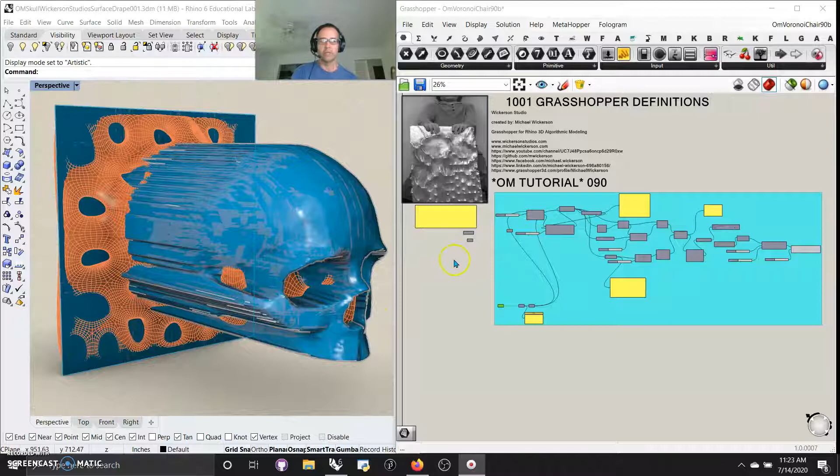This is one, but I did something with it that I think you'll find interesting. I don't know if I'll put the script online. I'll encourage you to go over the Voronoi chair example, but I've numbered it number 90. What I've done is found a way to bring out through a mesh a pretty simple form.

Let me swap this for a second. You can see a mesh here. If I put it to shaded, and then drape a surface over top - it's a pretty simple thing to do. Grab an object and drape a surface to it. Once you get that, whatever it is, a mesh or whatever you can pull offline, you can play with that a little bit as a surface. I think that's fairly interesting.

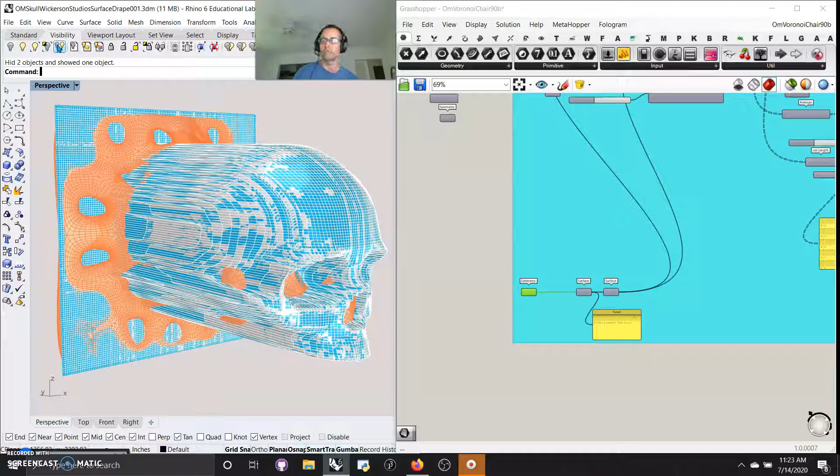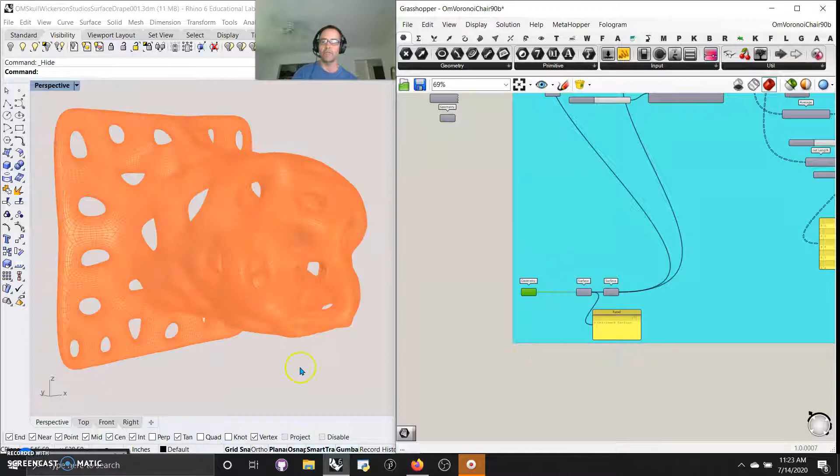The drape tool makes a lot of sense to me as a sculptor because we're always drafting forms out of molds, clay, metal, wax, everything. So once you get that narrowed down, you could grab that surface and tuck it away in hiding. Then you could take your visualization off, which would be preview off, and you're left with a pretty cool pattern that's based on a skull - it can be based on anything. It's not great art, I'll be the first to admit that, but it's an incredible script.

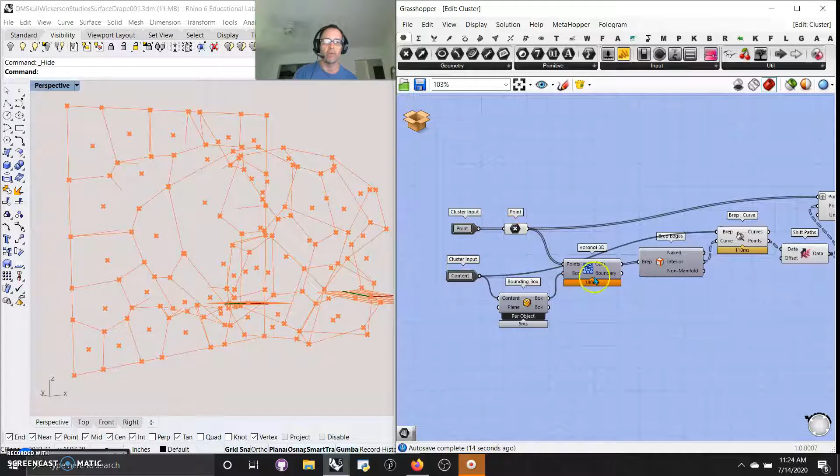They go through online with the Voronoi chair of populating basically a series of points. They use Hoop Snake - we've gone through 6 iterations, and they have a beautiful cluster they've actually compiled for you. If I double click that, it's just taking a little bit of time to open things up. You can go in and walk through the whole tutorial of the cluster that does all the work here. And yes, there's some things I had played with - pretty familiar with all of these to follow through: point, bounding box, Voronoi 3D, Brep edges, Brep curves, shift paths. But then I'd never really done a plane fit.

I'm not sure why, and I don't really use the angle that way. I do use sort keys, and there's a polyline that comes out of it for visualization. But pretty good, returning to your script - they use average quite a bit to pull some points in and have controls. List items are the same.

You have to be very careful with this flatten. You have to be very watchful of another flatten, and I should go back - one that might catch you up. Let me open it again.

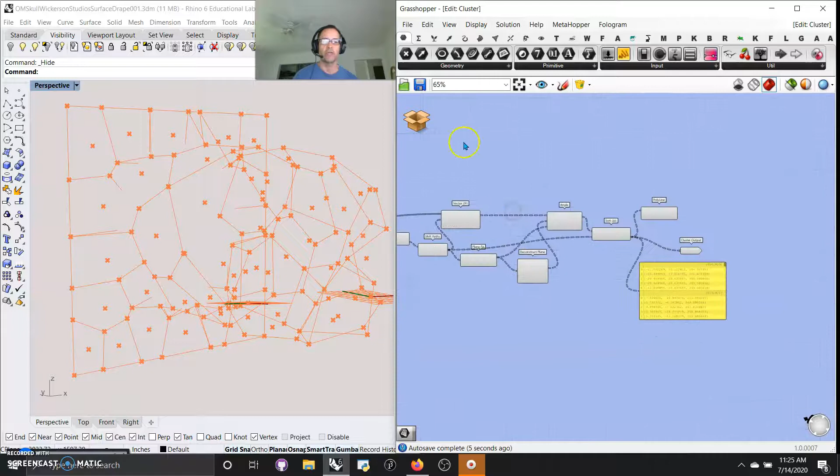One that I missed going through the tutorial - you have to be very wary of this graft, which takes place at this vector 2D point. If you don't do that, you'll have trouble having the interface that you want from these points as you move them around. You will have to set your mesh plane height count to 1 for this, otherwise you'll have trouble with your meshes, and you may have to extend an element mesh combine clean so you get a valid mesh in the end.

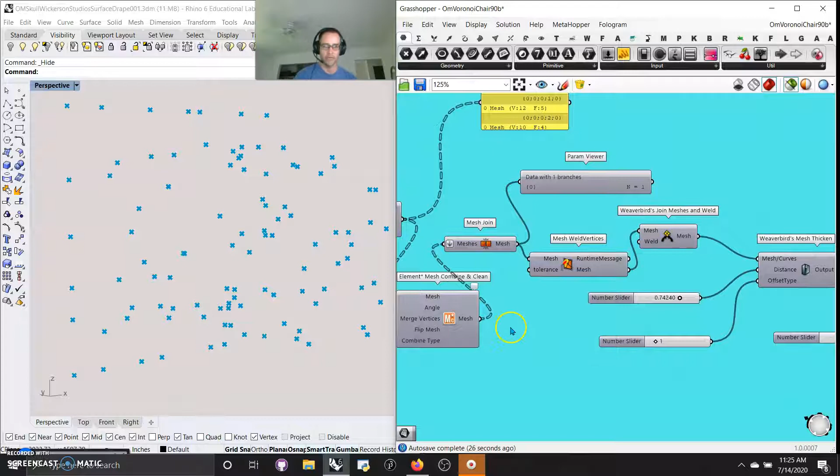I'm obviously Weaverbird is an incredibly powerful tool. I haven't spent a lot of time on it, but in the end, you're left with an awful lot of control to what you want to do, be it offset or whatever. As we go into here, you can see I can update it - I believe it has to go through quite a bit. I can offset the thickness of that, and think of these as structures or cages or welded systems - pretty amazing.

And then certainly taking it through what the Catmull-Clark subdivision does - if you're not familiar with that, play with it a little bit. So I see familiar tools keep happening. I'm going to bring us back to one subdivision, and then probably will never take it above 3. But just in case, I'm going to go into my - everything's pretty slow in this. So I'm going to take that up to, I'm going to take that up to 0, 1, 2, 4. I doubt I'll do a subdivision more than 4.

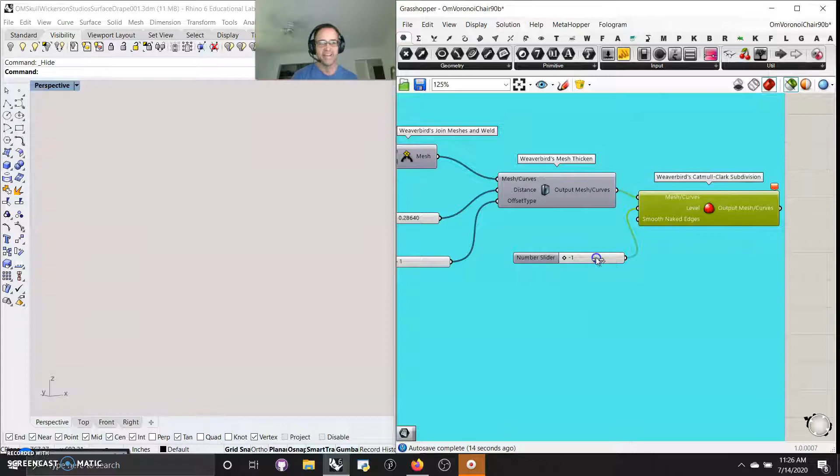Let's just try, and -1 is not going to work, so that will crash it out. I must have double clicked something there. So yeah, 4 isn't too bad. Let's just edit the snapping and go back in, but I'll leave this for you to figure out online. Like I said, I'll put that back to positive.

A pretty nice tool for grabbing some interesting geometries that are basically then draped over whatever surface you want. I've got multiple surfaces here, but as we go in and think about that object being made from that initial one - any mesh and anything I pop underneath it. So if you're familiar with vacuum formers or things like that, this could be an exercise worth doing.

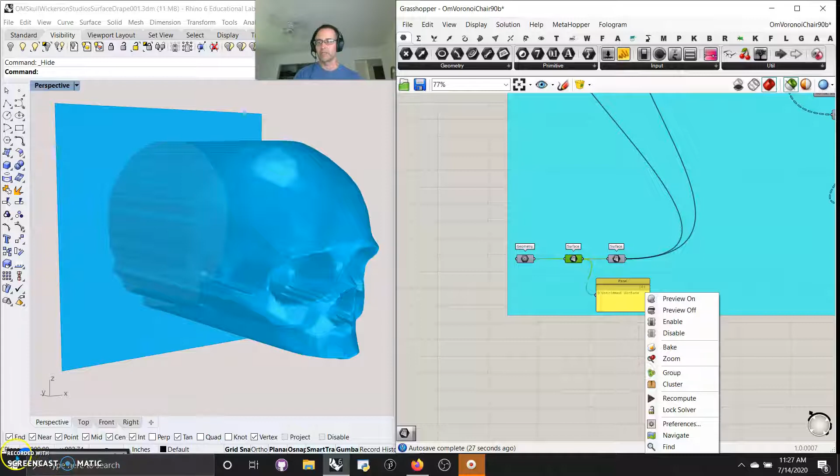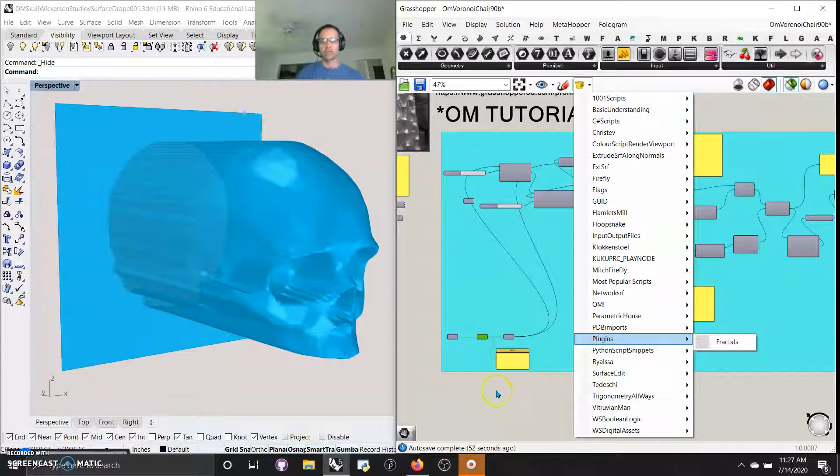Anyway, I'll leave that without going into detail of the script. Like I said, I'm probably not going to post it out of respect for OM's tutorial. One worth doing - if you have trouble with it, contact me. Pretty powerful tool, pretty powerful algorithm. I've already moved it into my, once I got it down, I moved it into my very quick OM snippets, which I can draw up and just show off in teaching in a fast fashion, but also let people dissect scripts that are very interesting as opposed to just working from scratch. Thanks for watching.